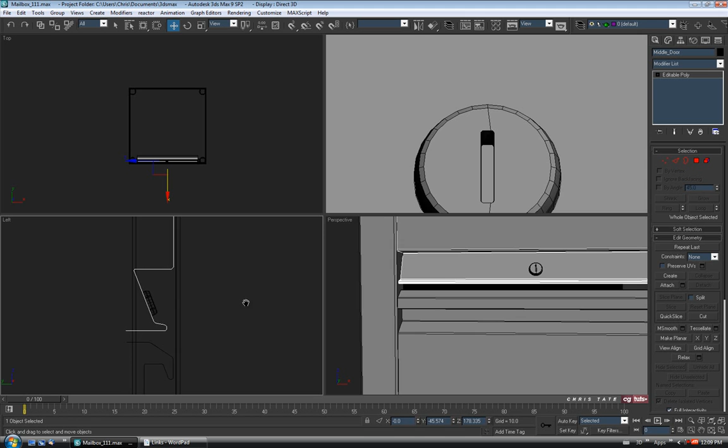Okay, so we'll jump into the left view with that middle door selected, and we'll just go to vertex and select these bottom verts and just pull them down to close it up. We don't have to go right together, but just want a little space there. Maybe like that, and then let's turn off vertex and select our keyhole and just move it back into position. Maybe like that.

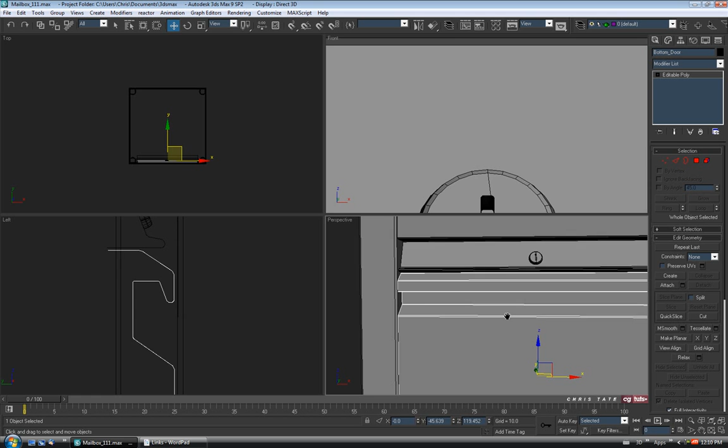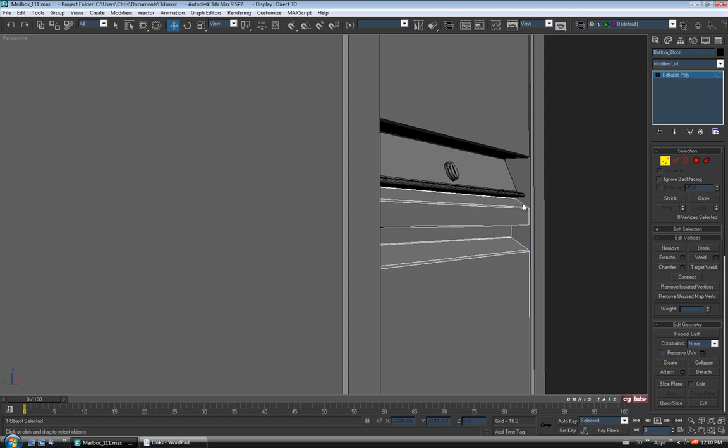Okay, and I think I also want the handle on the bottom door to be a little longer, so I'm just going to do that quickly as well. We'll go to vertex and I'm just going to select these guys and just pull them down slightly. Not too much, just like that maybe, just because on the reference picture I think it was a little longer than we had it. So just like that.

Alright, exit vertex. So we'll move on and start mapping it now, and like I mentioned in the intro, I'm not going to map all the pieces inside of Max. We'll do some of them in here using the unwrap UVW modifier, but I am going to export a few of the pieces out to the demo version of UVLayout.

Okay, so before we go any farther, I'll just give the URL right now where you can find that, and it's uvlayout.com. So you can just go over there and download the trial version. It'll last for about 30 days and then it'll expire, and you'll either have to purchase a license for it or download another demo version that'll last for another month.

Okay, and I haven't actually purchased it myself, but I've been using the demo version for the last few months and I really like it, so yeah, I'll be using that on a few of the pieces. The trial's not fully functional, but it'll have everything we need to do our mapping.

Okay, so if you want to go over and grab that, then you'll be able to follow me step by step. And I'm also going to be using the free Obj Exporter from GuruWare, and that's the URL for it right here. You can just go and download that for free and install it. It's similar to the Obj Exporter that comes with Max, but I like it a little better, so I'll be using that. Okay, so I've already installed both of those, so we'll move on here, and I think I'm going to start mapping the top here first.

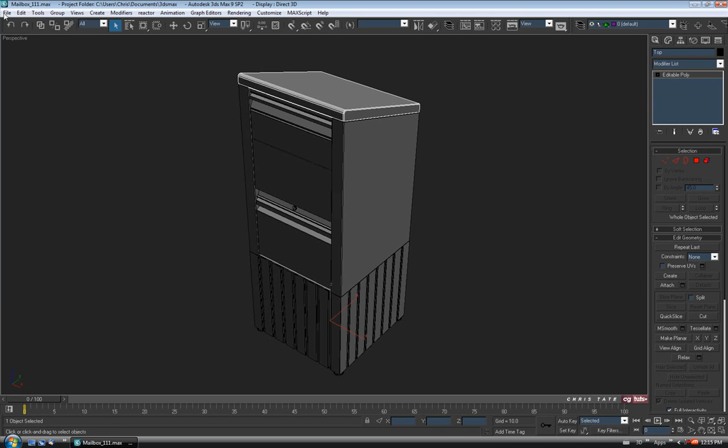So for that one I'm going to actually take it out and do it in UVLayout, so I'm just going to select it and we'll just go to File, Export Selected. And I'm going to save this onto my desktop. Okay, and we'll just give it a name, we'll call it Top.

Alright, and once you install the Obj Exporter, you can find it in the list here. It's the GW Obj Exporter. So I'm just going to select that and then hit Save. Okay, and it'll come up, and it looks similar to the one that ships with Max.

I'm going to leave everything at the defaults besides the faces here. I'm going to change the pull down to polygons, and I think by default it's set to triangles. Okay, so we'll choose polygons, and the only reason I'm doing that is because we have some n-gons on some of our pieces, like on the side of our top here. And if we leave it on triangles, when we export it, it's going to try to figure out how to cut those n-gons into quads, so it's going to cut a bunch of edges all over the place as it tries to figure out how to quad it up. Alright, so we'll leave it on polygons, that way it'll stay just like this in UVLayout.

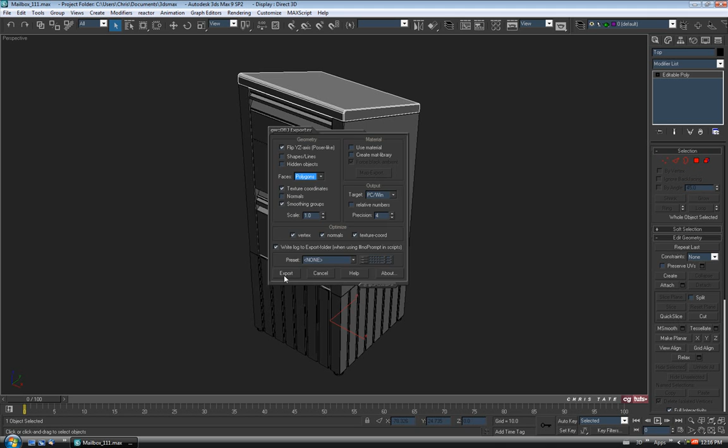Okay, so do that and then say export and then hit done. That's it, it's exported, so let's minimize Max. Go to the desktop, and here's our OBJ right here. And when you install UVLayout, you'll get this icon on your desktop, so to load up your OBJ in there, you just drag it and drop it on the icon. And that'll load it up, so we'll just stretch the window a little bigger so we can see.

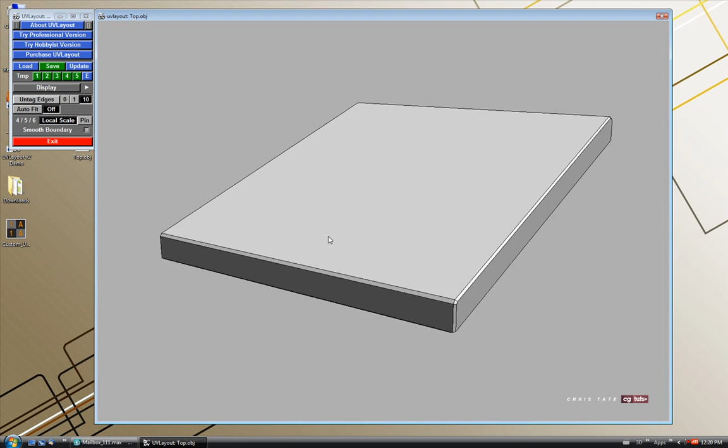Okay, so I'll just go over the navigation quickly for UVLayout. To orbit your camera around, it's just the left mouse button, and move your mouse around. To pan, it's the middle mouse button, and to zoom, it's either the scroll wheel or the right mouse button. Pretty simple.

Alright, so our geometry is really simple here, and it's going to be able to flatten it out really quickly, but we're just going to split it a couple of times to help it along. So I'm going to cut the corners.

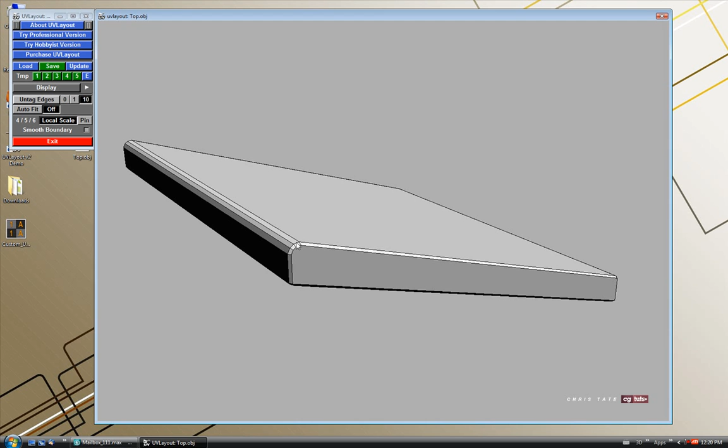Alright, so let's just open up the display tab over here. I'll go over this really quickly. By default, it'll have 10 selected here, and that's just going to be how many edges it'll select when you select an edge. So if I hover over an edge here, the way you select them in UVLayout is you just hover over the one you want, and press C on the keyboard.

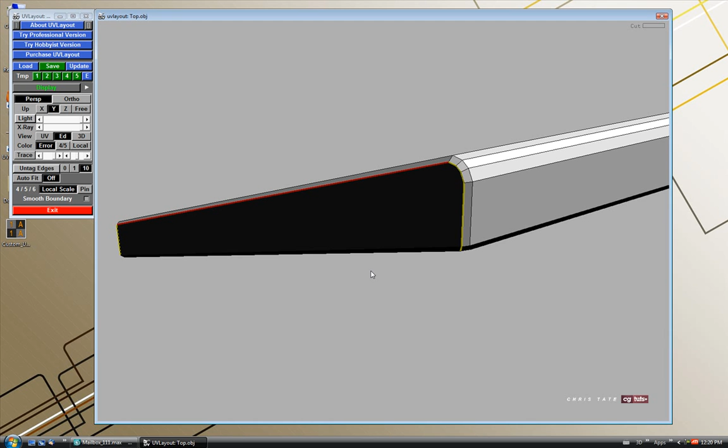So I'll do that now. C. You can see the one we selected turned red, and then it added these extra ones to either side of our selection, because we have 10 turned on here. If you had one turned on, I'll just undo that, Control Z. If you just had one turned on and did the same thing, C, it would just add one to either end of your selection.

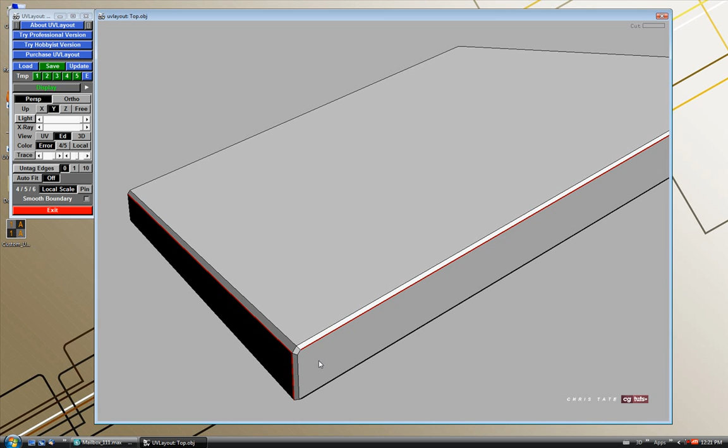Obviously 0 will just pick single edges, so you can go along and be really precise if you want. Just gonna undo that a couple times, Control Z. Alright, so let's just turn it on 10.

And we'll just select this one right here, so C. We want this to go all the way around to the bottom, so I'm just going to hit it there, and then go up to this side, and just hit C one more time. We just want to make sure we go to the blue border here.

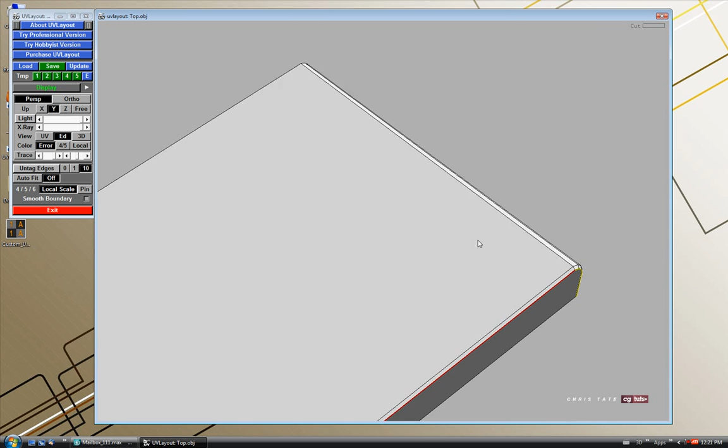But we don't want to cut the whole side off, so we want to deselect this red one. To deselect it, you just hover over it and press backspace, and you'll see it deselects. So just from this piece all the way down to the inside of the corner on both ends.

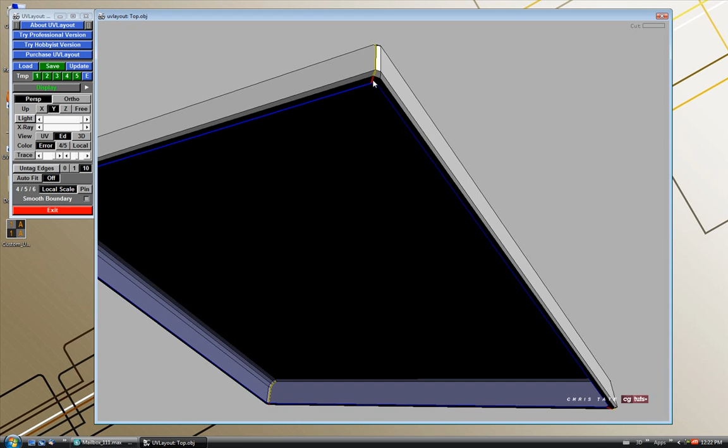And then we'll do the same thing on the other side. Same edge, C, and then backspace this one out. And then let's go underneath and just make sure it went all the way around. So C again and C again.

Okay, pretty simple. So to actually split that open, you can either hit Enter or Shift and S. I'm going to hit Shift S, and you'll notice it splits it open.

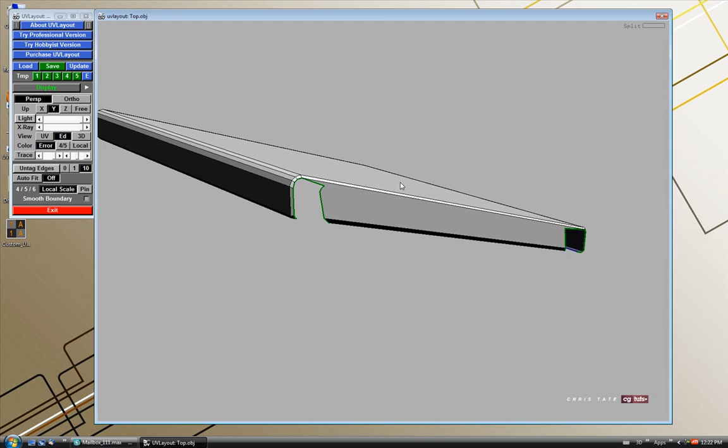And then all we have to do now is just drop this from our editor window into the UV view. So I'm going to hover over it and just press D on the keyboard, and that'll drop it from our editor space to our UV space. We'll just go over here, tick on 3D quickly, and then go over here to UV. Here it is in UV view with the 0 to 1 box, just like in Max.

Okay, so to flatten it down, there's a couple ways you can do it. If you're working on something that's really, really simple, you can just hold down the F key until it flattens out and then let go when you're happy with it. Or you can do initial stretch before you flatten it.

To do that, it's Shift and F, which I'm going to press right now. Shift F. It's really simple, so it's done almost immediately, but what this does is it just stretches it out, similar to pelt mapping in Max. It just pulls it in every direction, and it'll do that for a minute, depending on how complex your geometry is, it might take the full minute to figure out how it's going to stretch it out.

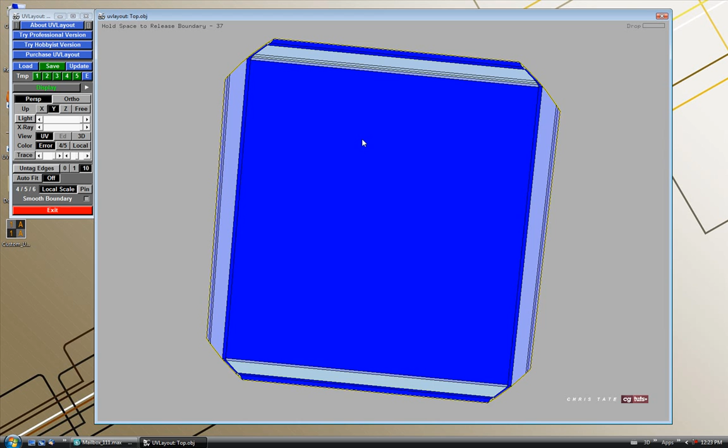But as you can see, nothing's happening here. It's just sitting there, so we can stop it ahead of time by pressing spacebar. Then it'll actually go into the flatten part of the operation and flatten it down. You'll get a minute countdown again here, and then it'll stop and be as flat as it can do it. But ours isn't moving anymore, so we can just stop it ahead of time by hitting spacebar.

Okay, so there it is, all flattened out. When you're doing this, you're just looking for consistent color, this green color, if you can get it. You can see here we have a slight pinkish color, so that's maybe a very slight stretch. If it was really bad, you'd see red all over the place, and you'd know you have stretches.

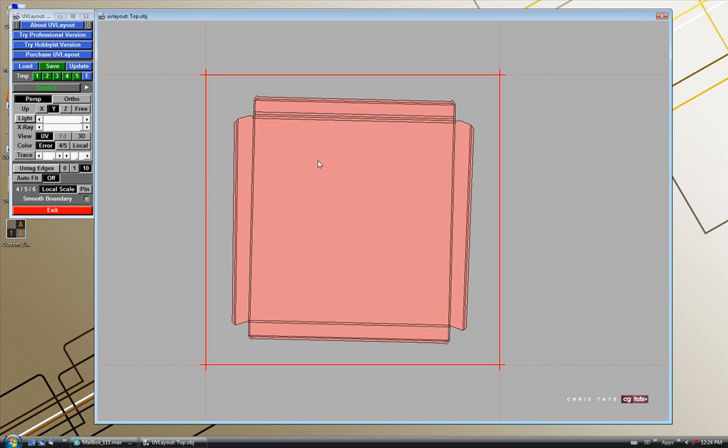This is probably fine for what we're doing, so we'll just straighten it out. To do that, inside the editor window, you hold down the spacebar, and the left mouse button will rotate, the middle mouse button will pan, and the right mouse button will scale the shell. But we don't want to scale it, so I'm just going to hit Control Z. I'll just try to straighten it out with spacebar and the left mouse button.

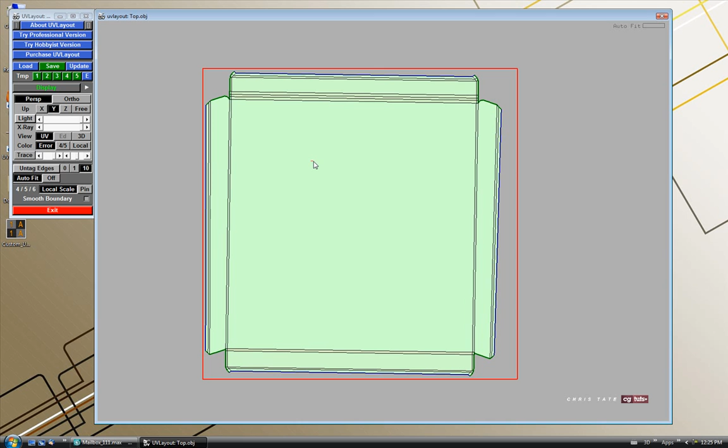Get it somewhat straight, and then we can either scale it manually to fit it into the 0 to 1, or you can just go over here and hit auto fit, and it'll do it for you. It's not perfectly straight, but we can probably straighten that out a little better inside of Max, so we won't worry about it for now. We'll just leave it like that, and then go back to the 3D view.

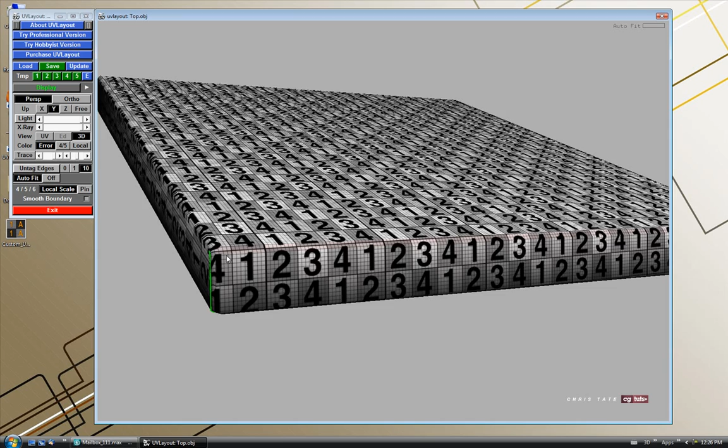Click 3D. We'll just check our mapping, and to do that you can press T, and it'll give you the checker pattern, and then T again will give you more detail. Just like that. It doesn't look too bad. There's some slight pink here, but it doesn't look like it's gonna really be a problem, so we'll just leave it.

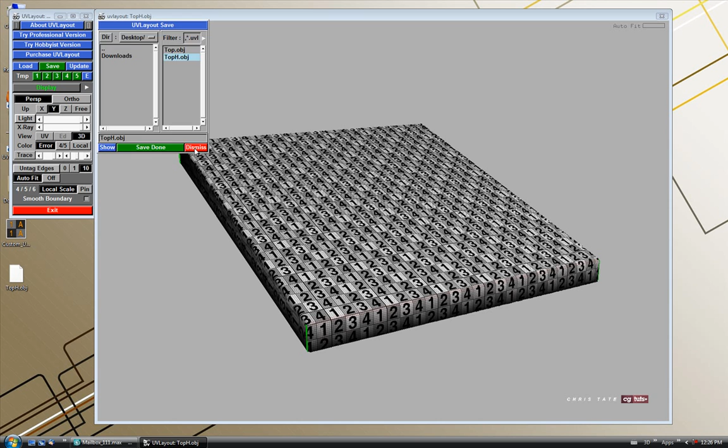So we'll just save it out. Let's go up to save, and I usually like to add an H to the end of the name here, just so I know that's the version from UVLayout, and then we'll say save. You'll see it pop up on the background there, and then we'll just dismiss this and close it and exit. I'm just going to dump the original version from Max because we don't need it anymore, and we'll keep our mapped version here. I'm just going to go back into Max, and we'll just delete our top.

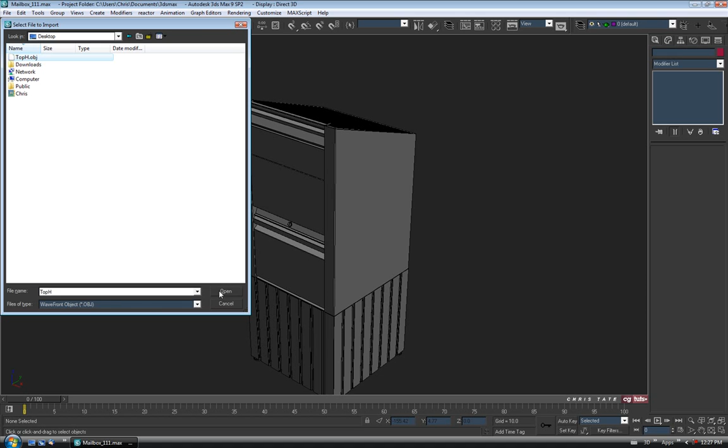Delete, and then let's import the mapped one. So we'll go File, Import, go to the desktop, and change this to OBJ. For the imports, I'm just going to use the standard OBJ importer. We'll select our top and then hit Open. For the options here, I pretty much have everything turned on. Just make sure you have single ticked because we have a single object. Then we'll say OK.

So there it is, and by default it's going to name all these pieces default when we bring them in, so I'm just going to change the name back to top. It's also going to make it editable mesh, as you can see here, it won't be edit poly, so I'm just going to convert it back to editable poly quick. Change our color back to black.

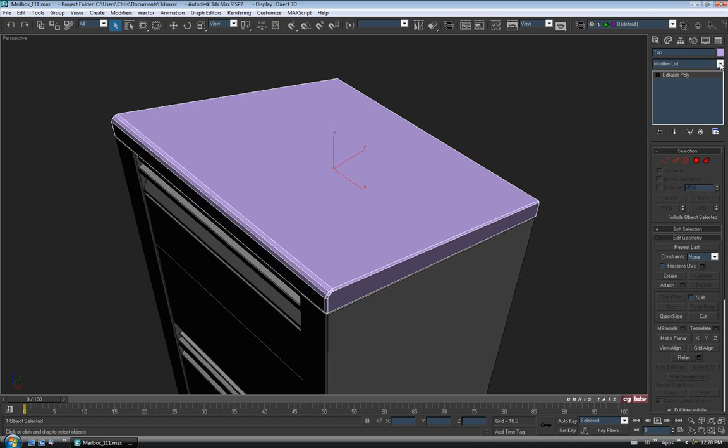Let's just open up the material editor with M. We're going to need something on here so we can actually see how our mapping is looking. Maybe you have a little UV pattern you can use to do this. You could use the checker pattern from Max, but I usually prefer to use an actual image when I do this. I made a little quick one in Photoshop that you can actually download from my site in the tutorial section if you don't have one that you can use. So I'm just going to open that up right now.

So I'm going to take a new material, open up the map box for the diffuse channel. Just choose bitmap and go to my desktop. I just have one here, this guy, and I just made this quickly in Photoshop, and this would be the one that you can download from my site if you want to use it. So I'm just going to open it.

It's pretty small, it's only 300 by 300 pixels, so I'm just going to give it some tiling, let's do maybe 20 by 20. Then we'll just drag and drop it on the top. We'll also turn on show in viewport here so we can see it. Just close that. So just like that, and again, you can use pretty much any checker pattern that you might have, it doesn't really matter.

Alright, so let's put an unwrap on this piece. Into the modifier list down to unwrap UVW, and we'll just hit edit.

So they're still in the same place as they were inside of UVLayout, so let's just try to straighten this out a bit. I'm going to shrink the window so you can see it in the background. I'm just going to turn on face, and I have select element ticked so we can select the whole chunk. I think I'll just relax this a couple of times and see if I can straighten it out. I'm going into the viewport and pressing F2 to turn off the red shading so we can see a little easier.

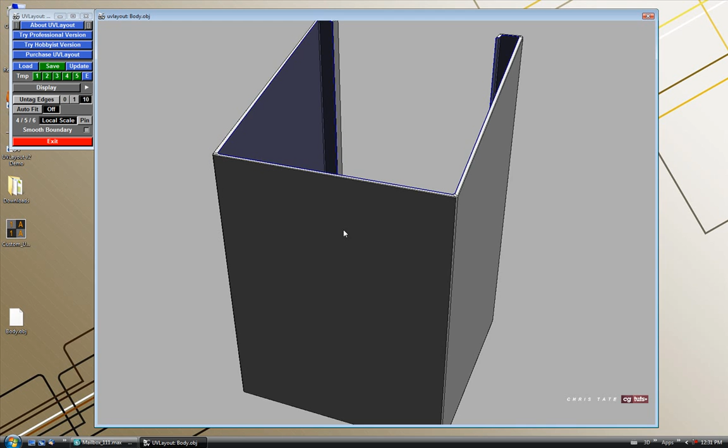We'll just make this a little bigger. So the body piece is really simple—I'm just going to split the corners just to help it along. Let's open up the display again. I'm just going to change the edge selection to 1, and then let's zoom in on the corners here.

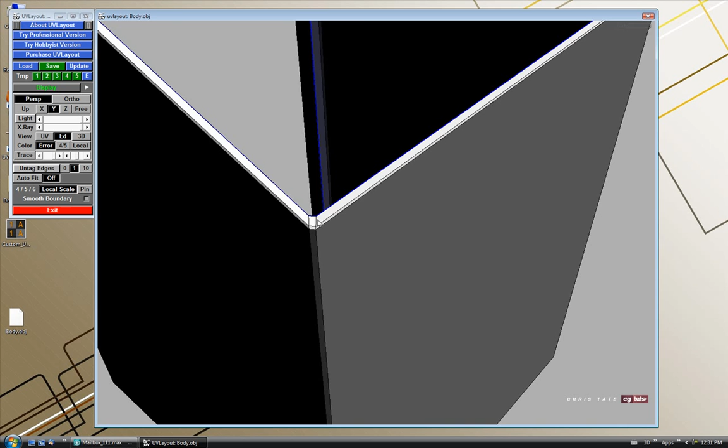I'm just going to split these. Maybe we'll do it right here—hit C, C on that one, go around to the back. Just like that, and then we'll do the same on the bottom. This will just help it flatten out. Just so you have a little split on each corner.

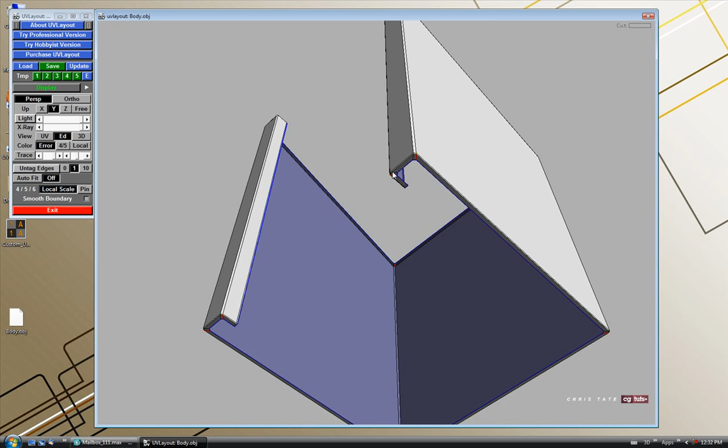Then we'll hit Shift S to break it open and D to drop it. We'll go back to our UV view, and it shouldn't have any problem doing this—it's pretty simple, so we'll just hit Shift F, give it a second, and then spacebar. I'll just let it straighten out as best it can. Just give it a second—looks pretty good, so let's just end it with spacebar. So there it is, all done.

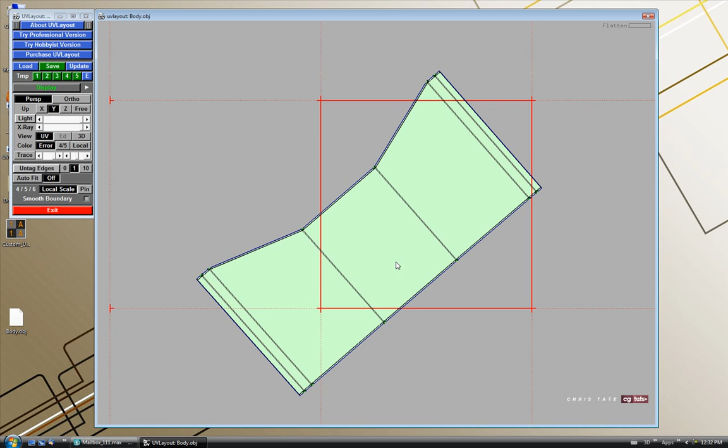And we'll just straighten it out, so spacebar and the left mouse button, just rotate it, try to keep it somewhat straight. Maybe like that, and then we'll just hit auto fit to fit it into the 0 to 1, and then let's go back to the 3D view and check our mapping. I'm just going to hit T a couple of times.

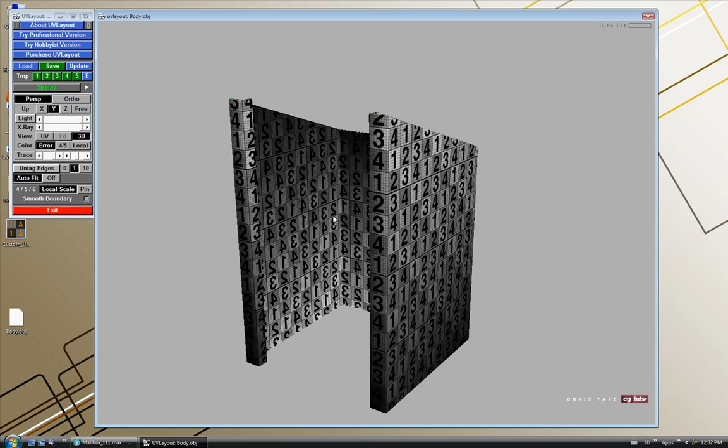Alright, so just like that. And it's really fast, that's why I like UVLayout. It's quite a bit faster than doing this in Max, I think.

Alright, so that looks cool, good enough, so let's save it. Just going to add an H in here, so I know that's the Headus version, and we'll hit save. Okay, and dismiss and close and exit. Alright, so let's get rid of the original, keep our mapped one, and we'll go back into Max and just

delete the body, and import our new one. Alright, import, body open. It'll remember the same settings you used last time, so just say OK. Alright, there it is. It's going to be named default again, so let's add a new name to it. Call it body. I'm going to right click and convert it to editable poly again, and change the color back to black.

Alright, and let's open up the material editor with M. We're going to just chuck our checker pattern on.

Alright, so let's put an unwrap on this piece. Unwrap UVW, hit edit. Alright, I'll just shrink the window down so we can actually see what we're doing. Okay, so same deal here.

I think I'll just relax this quickly. So let's go to face, make sure you have select element turned on, select the body piece, and then we'll just do tools, relax. Alright, I'm going to use face angles again. I just find that gives you a better result on most things than edge angles, so that's why I'm changing it. Alright, we'll put the iterations up, and then just hit apply a few times.

Okay, that's probably fine, and close this. Alright, and you'll notice over here these checkers are way bigger than the ones we have on the top.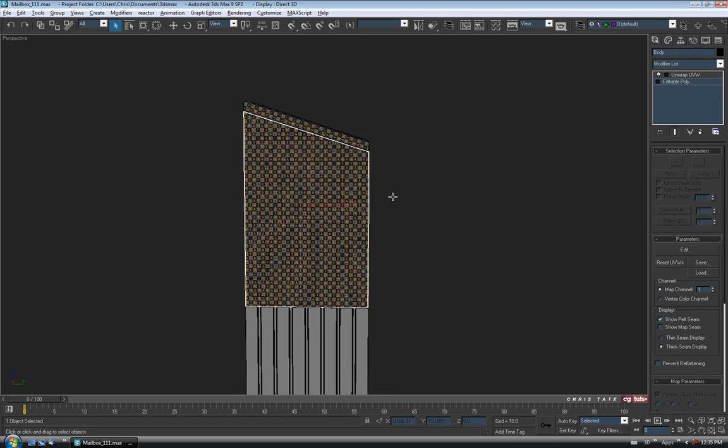Okay, so let's do a save quickly. I'm just going to name this mapping. Save copy. Okay, so let's maybe start mapping these doors now.

And we could do that in UVLayout, but I think I'll just do it in Max because it's not going to take too long. Okay, so we'll start with the top one up here, select it. Just open up the material editor and drag and drop our material. Okay, and I'm just going to kind of keep it there so I can see it in the background, and we'll put an unwrap on this.

Alright, unwrap UVW, and just hit edit. Alright, I'll shrink the window down so we can kind of see what we're doing back there. Alright, so for this I'm just going to use Flatten Mapping.

Alright, so let's turn on face and sync to element, and just select our whole chunk there, and then we'll just go up here to mapping, down to Flatten Mapping. Open that up, and we'll just leave it at the defaults, and hit OK. Okay, and what it's going to do is just break all the pieces up based on that 45-degree angle that we had in the settings there.

Okay, so we're going to end up with all these strip pieces, and you can see over here that everything's upside down right now. Alright, so the first thing we should do is just rotate this around.

Okay, so I'm just going to go to rotate, and you can rotate it just manually, or you can actually turn on your angle snaps up here and make it a little easier, because that'll actually apply in the editor window as well. Okay, so we'll turn that on and just rotate it 180 degrees. Alright, just so everything's upright. If you're using the unwrap tool script, you can just flip it with the buttons here.

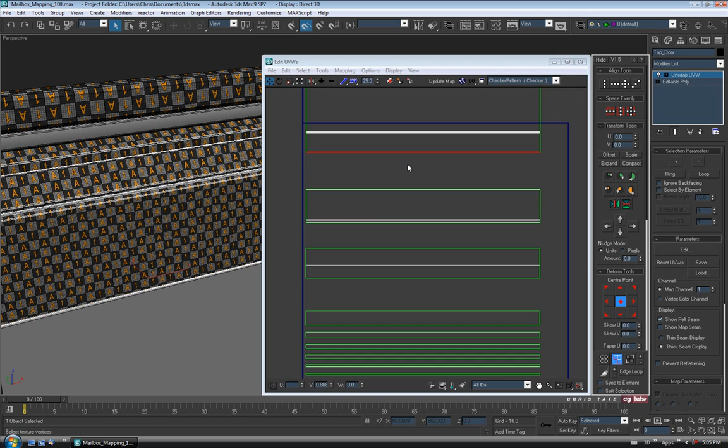I'm just going to spread these out and we'll continue on selecting edges. Not sure where this one is. Alright, that looks like the bottom one. So we'll go up to the top here and select that one. You want to make sure you get the green one, because that's the outside border. You can always tell because it'll show you the blue edge that corresponds to it. So stitch selected, stitch selected. We'll just keep doing this.

I'm just going to zoom in so I can get that green one. You want to make sure you get the green one, else it's not going to do anything. Alright, just keep going until we get up to the top. It's definitely faster having the hotkey set up, but either way, it doesn't matter.

Alright, that's all of them. So it's one piece again. I don't think we need to relax this piece, it's looking pretty straight. So let's zoom in here and check it out quickly. Turn edges off. Alright, so it looks like it's running pretty good over the indentations and everything, so that's probably fine.

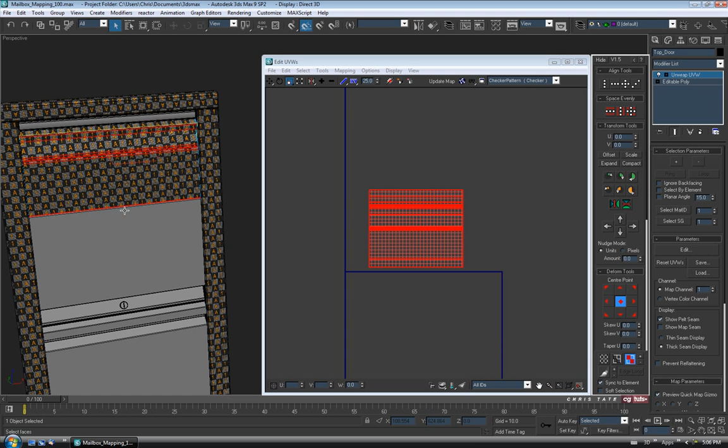Alright, so we'll just scale this quickly. I'm going to go back to face, turn on Sync to Element, select the chunk, and we'll scale it down slightly, trying to match our checker size back there. Okay, maybe just like that. And then we'll leave this outside of the 0 to 1 as well. Just stick it down here maybe. And then close this and turn off the unwrap.

Okay, so there's one door done, and we'll just repeat the process on the middle door as well. Add an unwrap, edit, face, Sync to Element turned on, select our chunk, mapping, flatten mapping. Alright, and just move this out of the way, you don't need it that big.

Alright, so let's put our material on this one. And again I'm just going to flip it, so you can use rotate if you want. I'm just going to hit the button over here to flip it over. Alright, and we'll go back to edge, turn off Sync to Element, and just repeat the process on this piece.

Okay, stitch selected. Alright, I'm just going to move them apart a bit because I think they're starting to overlap. So just give them some space so we can see what we're doing a little better. Back to edge, turn off Sync to Element, and we'll keep going here.

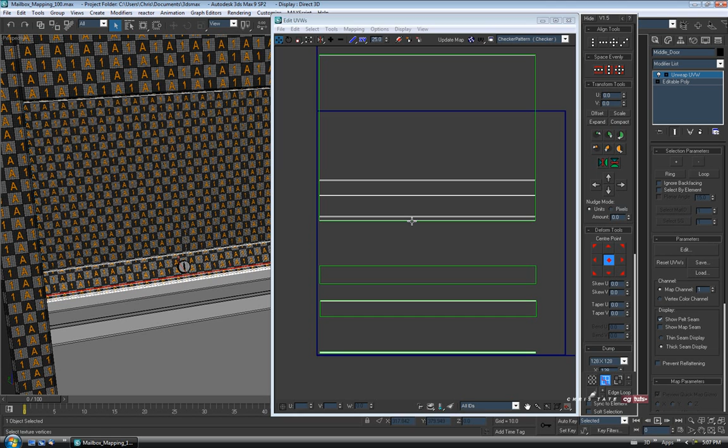And you could go into isolation mode on the piece if you wanted to make it a little easier to see your edges, but you can also just use wireframe. So we'll stitch this on. Alright, keep going. Alright, I think that's the bottom, so let's go up to the top here and just grab this guy. Stitch selected. Alright, so it's all one piece again.

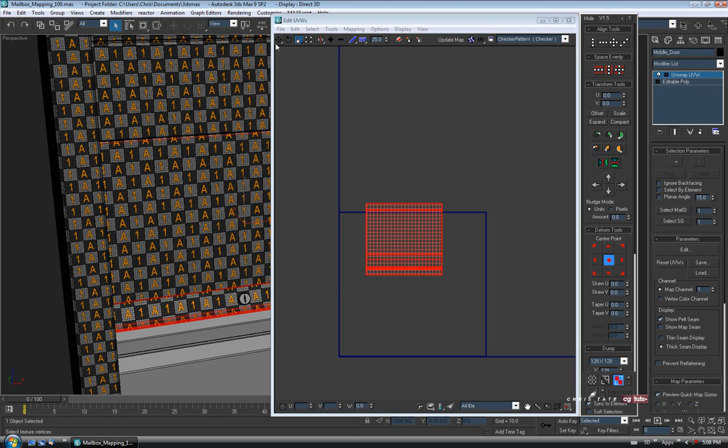Alright, and that's why I wanted to keep the model really simple, because it makes this whole process a lot quicker and easier to do. So we'll go back to face, turn on Sync to Element, just grab our whole piece and scale it, scale it down slightly. And again, this doesn't have to be perfect, we might have to change the size of these when we pack them later on. So we'll just get it close and then move it out of the way. And then close this and turn off the unwrap.

Alright, and we'll do this one more time on the bottom door. So add an unwrap, edit, back to face, select the whole piece, and then flat map it. Alright, these will be upside down too, so let's put our checker pattern on there so we can see, and we'll just flip this 180. Okay, and then we'll start stitching.

Alright, just going to try to shrink this up a bit, it's too massive. Alright, so back to edge, turn off Sync to Element, and we'll just start stitching them together.

Alright, stitch selected. Again, I'm just going to give them some space so we can see a little easier. Zoom in here, grab the green one, stitch.

Alright, I think we're getting pretty close to the bottom there. Just going to select this one. So I think that's the bottom one, so let's go up to the top here and we'll just do the same thing. Stitch.

Alright, getting close, one more piece it looks like. Just want to make sure you get the right edge. Stitch selected. Alright, so all one piece again. Okay, so same process here, we'll just grab the whole piece and just scale it.

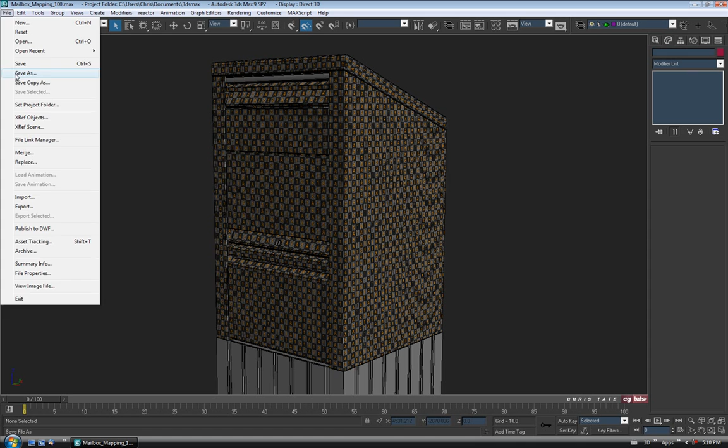Alright, so I think we should probably just get the base out of the way right now. This piece I am going to take out and do it in UV layout, so let's select it and export it. Export selected, save it on the desktop, you want to use the GW one, and we'll just call it base and save.

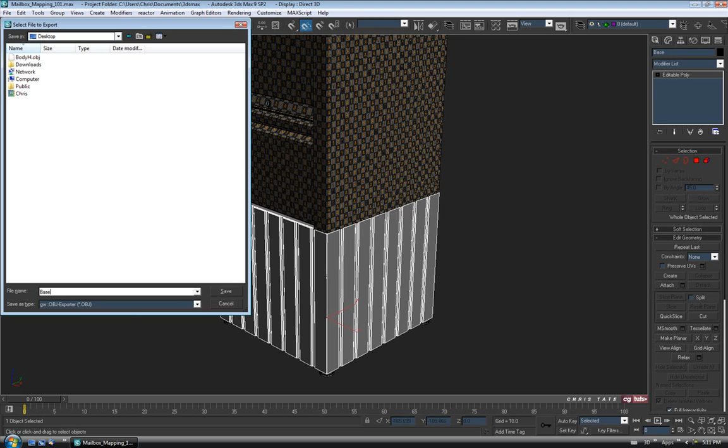Okay, same deal as before, just say export and then say done. We'll go to the desktop and get rid of the body one, we don't need it anymore. We'll drag the base onto UV layout and drop it and just say load.

Okay, and we'll just make this a little bigger. So for this one I think I'm just going to chop the top and the bottom off to make it a little quicker. Let's zoom in here, and I'm just going to start on maybe this edge loop right here at the bottom of that chamfer and just hit C.

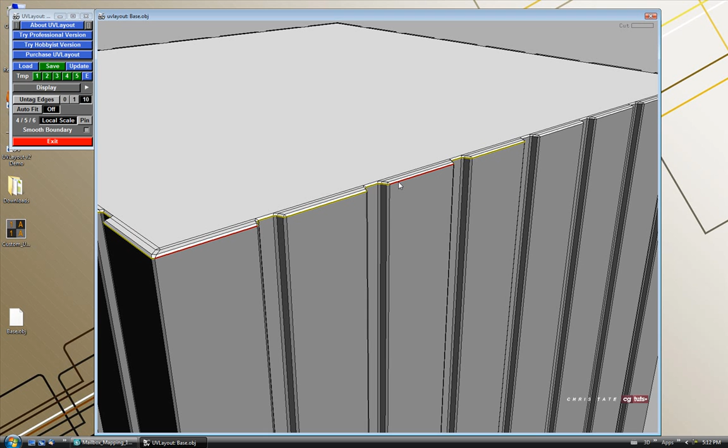And we'll just go along, I have my edges set to 10. So we'll just work our way around the entire top. Just be careful you don't miss any of these little tiny edges, else it won't break off properly. So we'll just go along hitting C, try to follow the same loop.

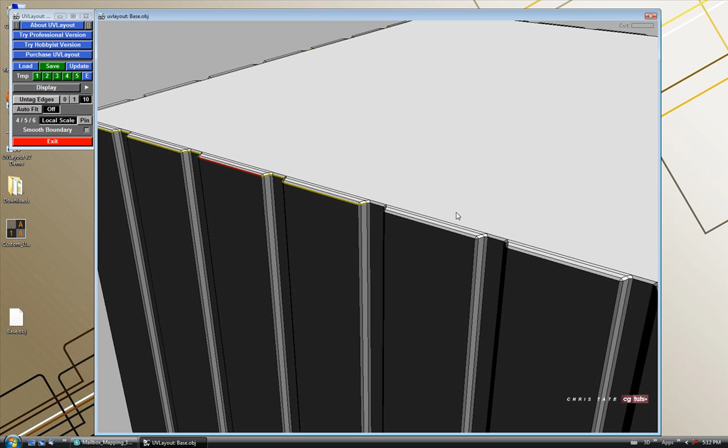Oops, sorry about that. Alright, back to where we started. It looks like all of them, so I'm just going to hit enter.

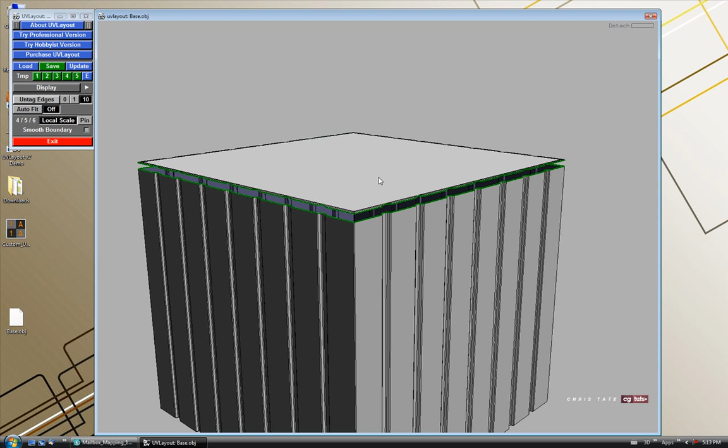And if you want to make sure it detached, you can always hold down spacebar and the middle mouse button and just drag the piece up, just to make sure everything's broken apart properly. Okay, that's fine, so we'll drop the top with D.

Okay, and we'll go down to the bottom and just repeat the process. Alright, so I'm just going to start on this edge loop here. C, C, C.

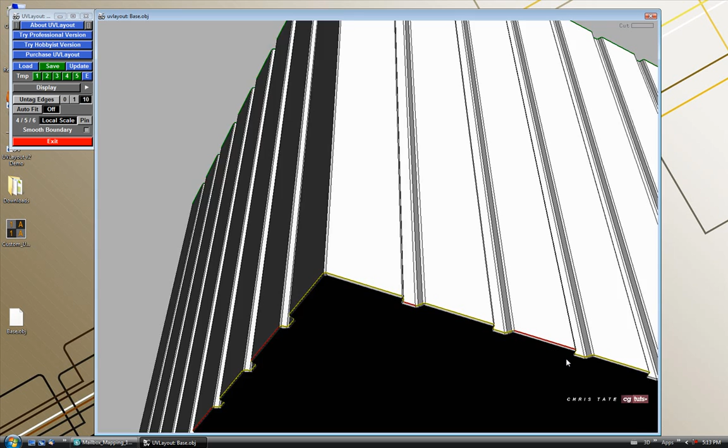Alright, just around the corner. Just want to make sure I didn't miss anything. Looks good, so we'll just keep going.

Alright, back to where we started. Oh, it looks like I missed some here, so I'll just go down the side. Alright, so I think that's all of them. Oh, one right there.

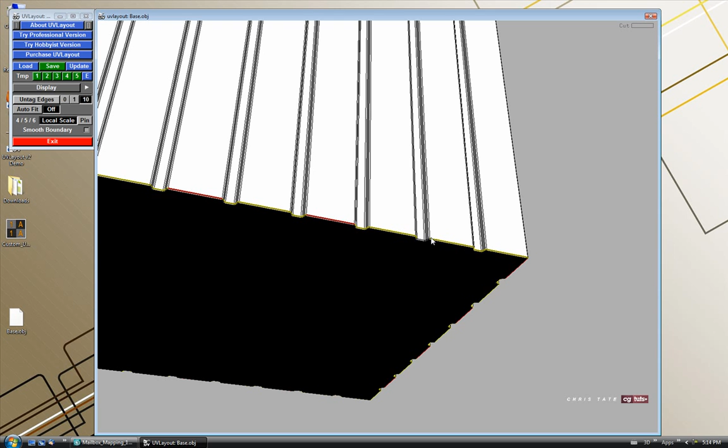Okay, so let's try to detach it with enter. Okay, and spacebar and middle mouse button, drag it down. Alright, looks good, so we'll drop that piece with D.

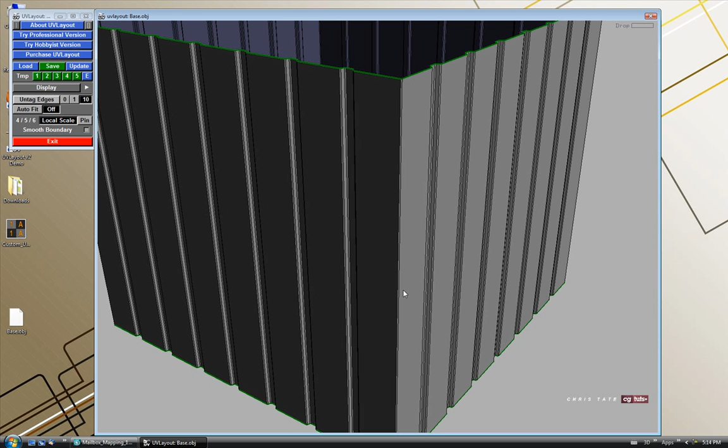And then we're just left with the sides of the base. Alright, and I think for this I'm just going to maybe break it into two different pieces. Okay, so I'm going to split it right on the corner here, so we'll just hover over one of these edges and hit C.

And then we'll go around to the opposite corner, hit C. Then I'm going to hit enter to break it apart, and again you can always drag to make sure. Alright, and we'll just drop both of these with D and D.

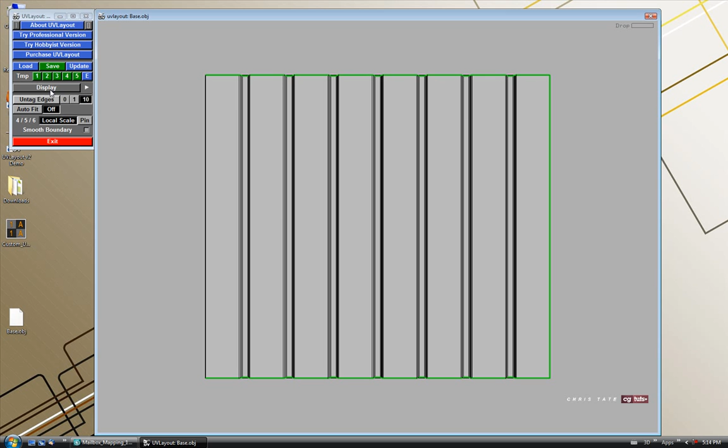Okay, so let's jump over to the UV window, I'm just going to open up the display panel here, just hit 3D and then hit UV. Alright, so these are really simple, we might be able to just hold down F here, so I'm going to do that.

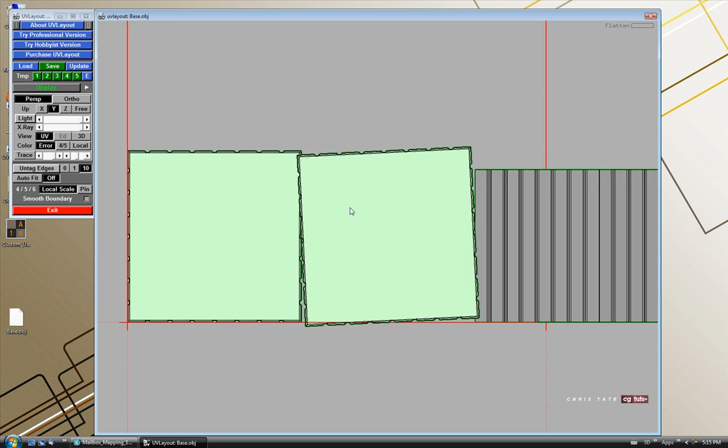Hold down F, you'll see it flatten out, and then you can just let go. Or you can hit Shift F, spacebar, spacebar, either way it doesn't matter. Put those there, and then we'll do Shift F on this, and spacebar, and this might take a couple extra seconds to do, just want to wait till all this pink gets out of there.

Alright, looks like it's not moving too much anymore, so let's stop it with spacebar, and then we'll do the same on this piece. Shift F, spacebar, and just give it a second. This might not turn out perfectly straight, but we can try relaxing it in Max and see if we can straighten it out.

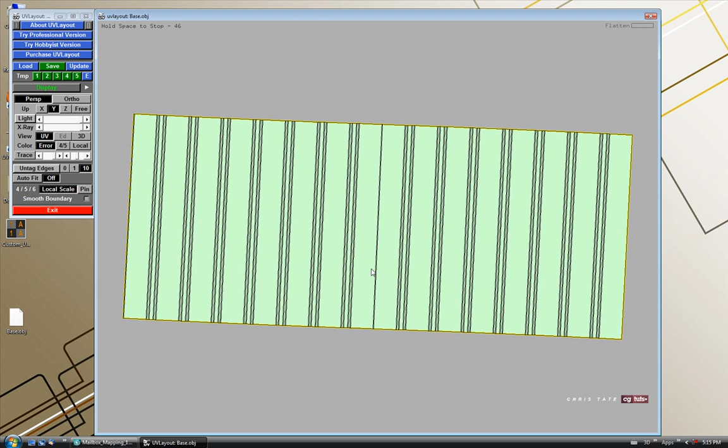Alright, so that's probably cool. Let's stop it, spacebar, and then I think for this I'm probably going to end up stitching these back together in Max, so I'm just going to stick these in here really quickly. Okay, so we'll put one up here, try to straighten it out a bit, and then I'm just going to move these out of the way.

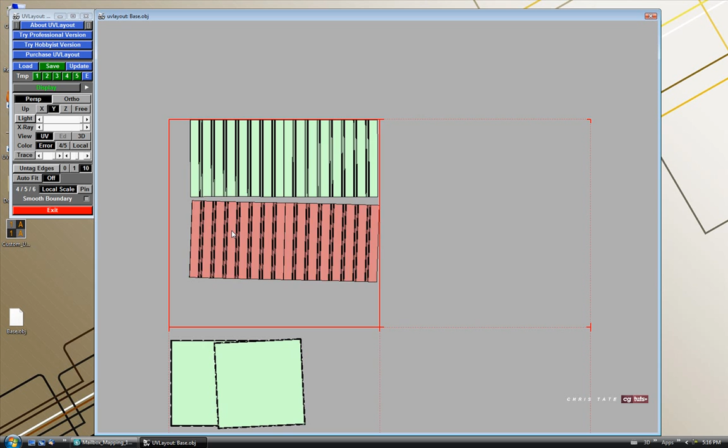Spacebar and the middle mouse button. Okay, and drag this one over, and rotate it, spacebar and the left mouse button. Okay, so I'm just going to stack them like that, and then stack the top and bottom just underneath it for now. We'll figure out what we want to do with it when we get back into Max.

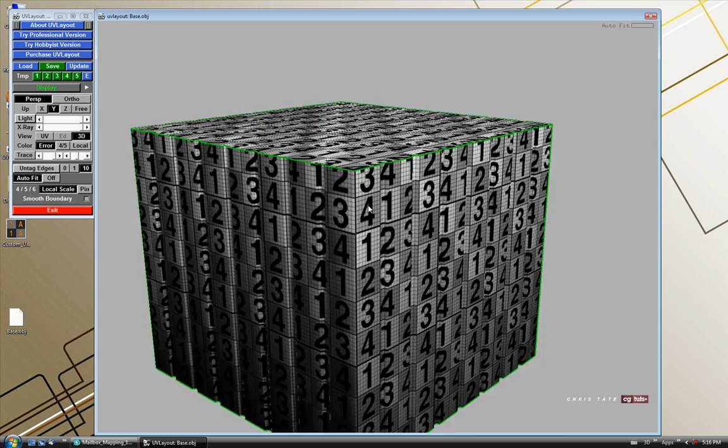Okay, so auto fit and 3D. Okay, and we'll just hit T, check our mapping. Alright, looks pretty good, I don't see any pink, so that's probably fine.

Alright, so let's save this guy out. Save. I'm just going to add the H in there again so I know it's the Headus version. And save. Okay, and dismiss, and close, and exit.

Alright, so let's get rid of the one we exported out of Max, because we don't need it. And we'll go back into Max and just delete the base, and import the mapped one. Alright, so import, desktop. I'll switch this to the Wavefront OBJ importer. Alright, select the base and open.

Alright, same deal as before, and OK. Alright, so there it is. Let's change the name to base again. Right click and convert it back to editable poly. Alright, just going to change the color to black. And we'll throw on our checker pattern.

Alright, so yeah, I think I'll stitch it back together. So let's put an unwrap on this. Alright, unwrap and edit. Alright, so let's just maybe try to relax it a little bit before we stitch it. Okay, so I'm going to go to face with sync to element turned on, and I'm just going to grab all the chunks, and we'll just relax them all at once.

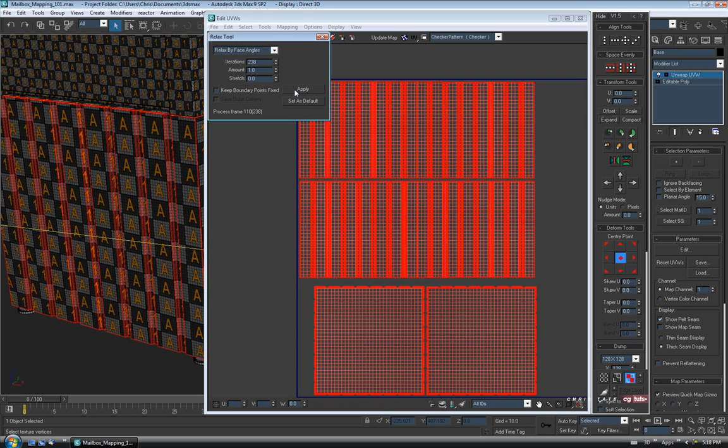Okay, so let's move this over a bit. Alright, so tools, relax, and again I'm going to use face angles, put the amount up to 1, and just pump the iterations up a little bit, and then we'll hit apply a couple of times. Alright, we might not be able to get it perfectly straight. Let's straighten it out a bit. Alright, so that's probably fine, so we'll just close that and let's stitch them back together.

Okay, so we'll go to Edge, turn off Sync to Element, and just select one of the side edges, and then right click and stitch selected. Alright, just so we have one strip piece for that, okay?

And I might just relax it again, so I'm going to go back to Face, turn on Sync to Element, and just grab it, and Tools, Relax, Face Angles, pump the iterations up and the amount, and then apply. Alright, that's probably fine, I'm not going to worry about it too much. I think it's more than good enough.

Okay, so let's just grab all the pieces and we'll just move them out of the 0 to 1. Stick them over here maybe for now. Okay, and then just close this and turn off the unwrap. Actually, let's scale them first, I forgot to do that.

Alright, so go back into the editor window. We're just going to shrink it up a bit. Alright, so let's go back to face and just grab all the pieces and we'll scale them up a little bit. Alright, shrink our checkers down. Alright, that looks pretty close, so we'll say it's good enough. Alright, and just close the window and turn it off.

Alright, so just like that, let's just check it out. Alright, looks good, don't see any weirdness. Alright, so we're making some progress here. We just have the little tiny pieces left, and that shouldn't take too long. Okay, so let's do another save.